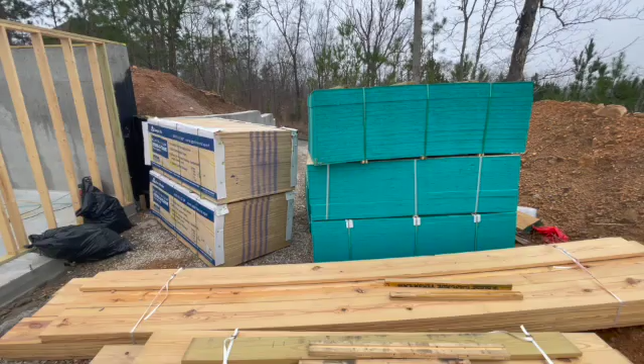What we got here is I went and purchased all of the OSB I think is going to go in this house right here. So I went ahead and bought that up.

This lumber bundle right here should save this homeowner roughly $6,500, maybe a little bit more than that due to the fact that I get a little discount at the supplier. The thing about it is this particular supplier has not adjusted their prices like everybody else. So everybody else has almost doubled in prices with OSB. These guys are still at the same price.

They're about $27 a board. Everybody else is about $48 a board. So I just went ahead and bought it all up for this particular house. We'll just see how this works.

That could be good or bad because if you got a lot of OSB sitting around on site, sometimes if you don't continue to watch your subs, they'll misappropriate it.

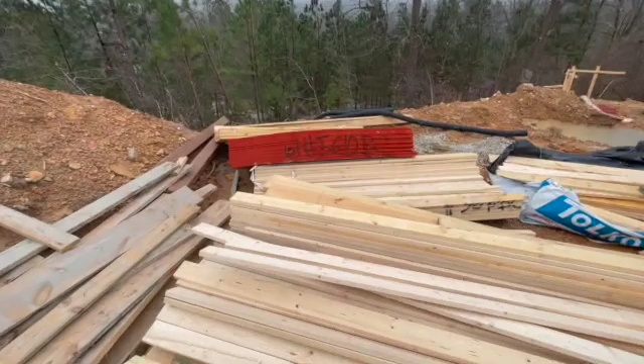Now, these guys sent my other lumber company, for some odd reason, they mistakenly sent this right here out. And I'm going to send it back. I told the guy, come get it. But I'm going to send it back because that stuff right there is about $50 a board. So we'll send it back, and we'll just use the ones that he's walking with right now.

I had to catch him because he was actually cutting into one of these right here. So I had to catch it before it got too far, before you start cutting out a bunch of them. So right there, that one cut right there cost me about $26.

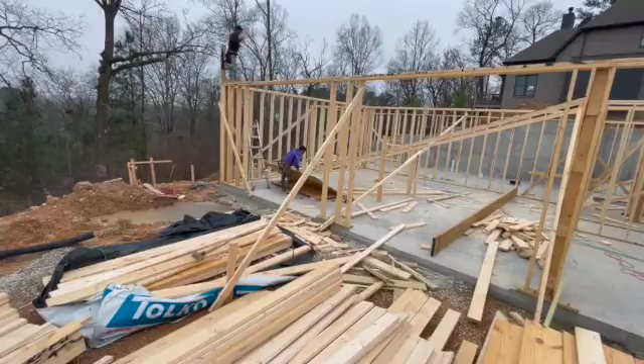Okay, so we got to always be focused. Now, the dimensional lumbers, I still buy that from my supplier. So all this right here is the dimensional lumber. I continue to buy that from the supplier.

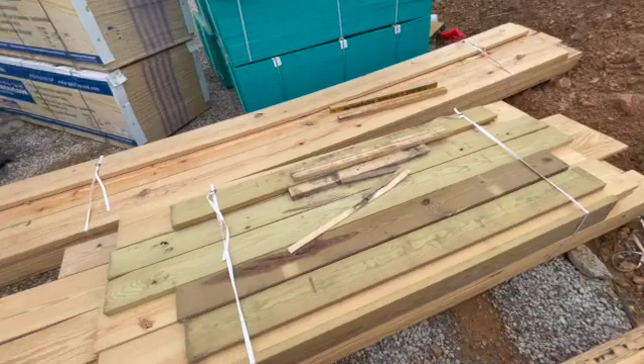That's not too much of a difference. It's probably almost the same, probably a couple of nickels and dimes difference between them and the same guys that sold me the OSB. So there you have it.

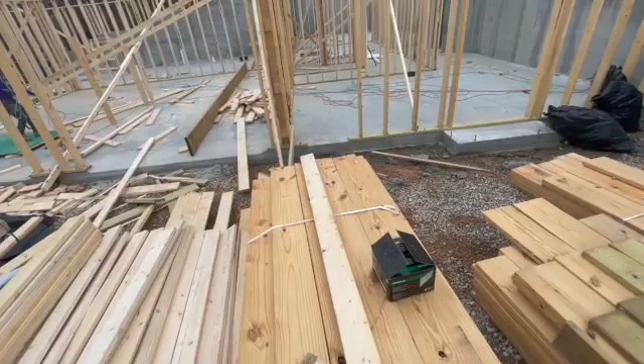Now what I did was, guys, you got to always be out here and don't take anything for granted, especially when you're dealing with your framers, and make sure you guys are on the same page as to how things are supposed to be framed.

Now, it doesn't mean that the framers are not good at what they do. It just means that you guys have got to be on the same page at how this lumber is supposed to be allocated. Because what will happen is, if you misallocate this lumber, you use it in the wrong spots and stuff like that, which I almost caught a situation earlier.

Now you gotta go buy the other stuff, and that's why sometimes in some of these sites you see lumber left over, and you see a lot of stuff that's left over. So what the builder had to do is order more of something else, and then the stuff that was allocated is left over. Now that benefits the guy that's selling you the lumber.

They want stuff like this to sit out here on the site and let these guys cut through it, because once you cut through it or put nails in it, you can't send it back. And so if you can't send it back, they make more money off of you.

But not only that, a lot of times this stuff gets left out here on site and it just sits here a long time. You're like, man, are you guys ever gonna come get this stuff? Well, it sits out here on the site so that somebody can come through here and end up cutting through it or using it. And now the builder is the one that loses money.

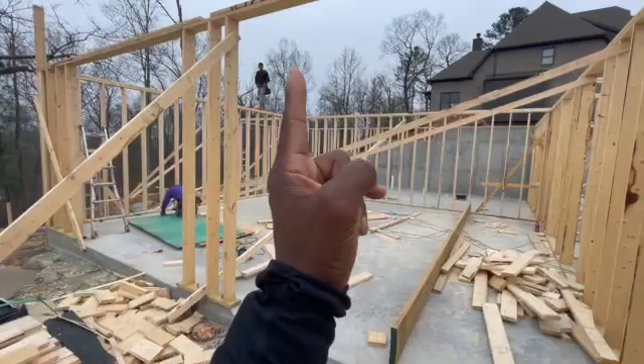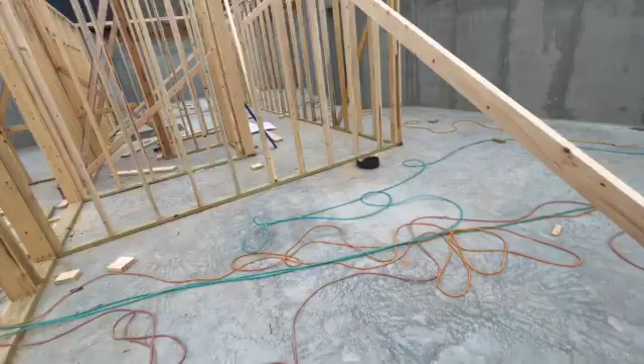So let's just kind of look at this right here, guys. So right here, this is one thing. This LVL beam, these guys were actually going to put it across here, right in the middle of where the garage bays are, which if you look at the plans, it doesn't call for an LVL beam. It actually calls for a girder, 3 of them, which needs to be 2x12s. So had I not been here, those boards right there would have been up there.

And then I have another beam that goes over here on this side. I would have had to order another one of those because those right there would have been used in the wrong place. This right here needs to be used over here. That's the whole purpose of it.

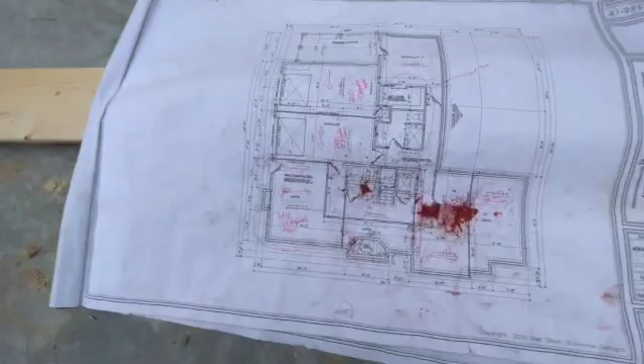If you look at the plans, right here it says girder as required. But I had to go to my code book and pull out my span chart, and I found that if I did 3 2x12s secured together, or nailed together, that would span—this is not actually 8.10, that's all the way to the outside, so this is more like an 8.3 or 8.4.

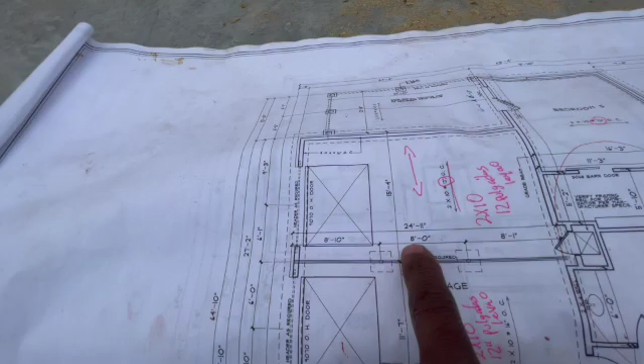It actually spans 8.5. From here to here, it'll span 8.5. Then from here to here, you span it 8 feet. And then from here to here, you got 8.1. So 2x12s will work right here.

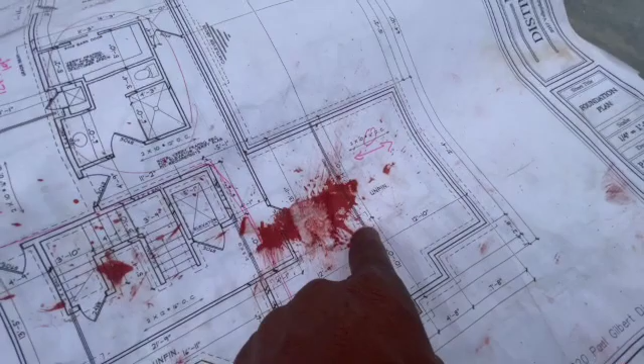You don't need an LVL like you see. If I move this out of the way to get really close, you can see where we have LVL beams right here—that's where your LVL beam is gonna go. And that span is even broken up too. We're gonna have 3 LVL beams that go across here, and that span is gonna be broken up as well.

So these are the things that I have to make sure that we catch. We gotta make sure we correct that, all right?

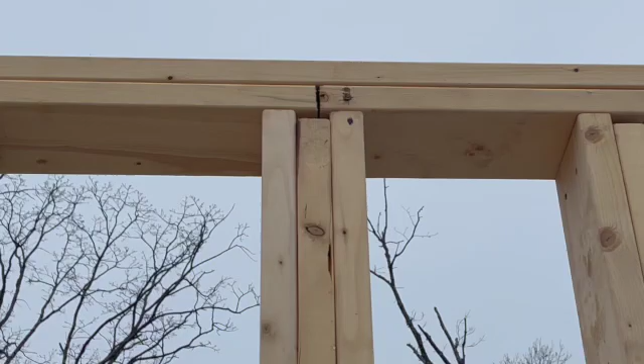Right here was another situation. You look right here, these studs—that stud doesn't go all the way up to the top. It's hard for me to get right up in there, but if you see that little gap right here, you can't let that happen. That's not supposed to happen, you can't do that. See right here, the one that goes all the way to the top.

Now, in their mind, if you nail this to it and raise it up a little bit, it will work, but that won't work. So you have to get another 2x6 and run it right here to make it work. That's 1, 2, 3, 4, 5, 6, 7, 8, 9, 10 2x6s that I lost right there because of that one error.

If that won't work, that's got to be taken down. I already talked with the guy. So these are the little things, guys, that—you know, we got our bracing up. These are the little things that you got to pay attention to, the little things you got to be out here for.

Also, you look right there—oh, we got cracks already on the concrete. Hey, you're going to get cracks on the concrete. There's no way I can stop that.

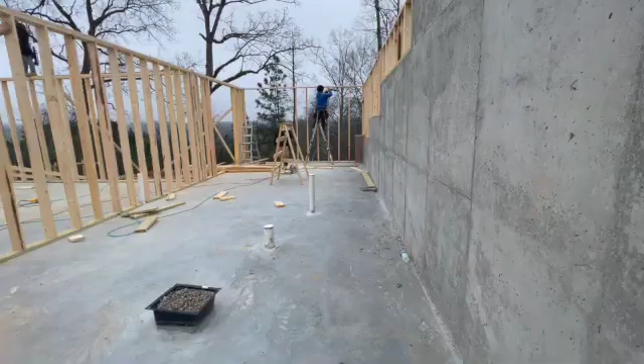One more thing that I like to do is try to keep it clean. I don't have a problem with lumber being everywhere. But I have a problem with stuff like—so this is not bad, this came from one of the saws or something, but I have a problem with stuff like this being everywhere.

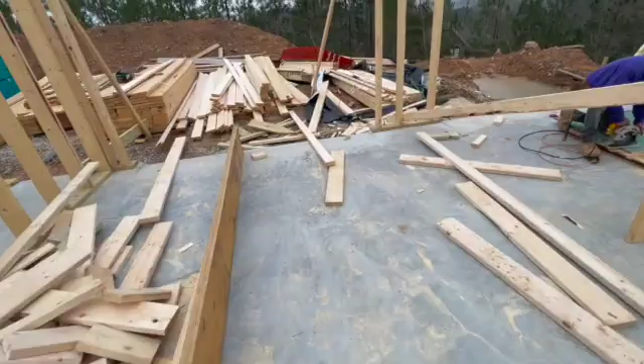Stuff like that. That's what you have here, guys. We got a little swimming pool right over here.

Oh, there's another thing I forgot to talk about. This guy right here, guys—these are nails. So what I do is I have an allowance for nails. Typically on a house this size, my allowance for nails is probably gonna be about $1,000. I probably end up spending $800 on nails. So nails is like gold. So what I'm gonna end up doing here is...

I just drop off one box at a time. So I come out here and check every day, see how much nails they're using. And if they're kind of depleting the nails, we'll bring another box out here. Y'all don't want these nails ending up at another job site—they're keeping the nails and stuff like that. So about when they run out of nails, I kind of monitor this right here, and I bring some more out here, because nails get expensive. It's like gold. And there you have it, guys.